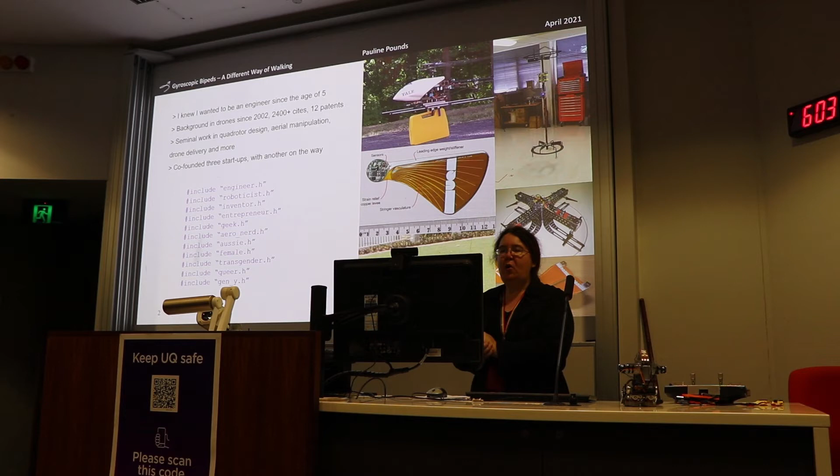What about me? Well, I'm kind of weird. I wanted to be an engineer ever since I was 5. I didn't know what an engineer was, but I knew I wanted to be one. I wanted to be one of those people who builds cool things, who builds complex assemblies and constructions and devices. You know, all the other kids wanted to be an astronaut? I wanted to build the rocket those poor saps would have to fly in. Those fools. Yes.

I've been working in drones since 2002, which seems a long time ago now, and I guess it is. But for me, that was actually during my 4th year at university. It was during my thesis project. So the work that many of you guys are doing, you for instance, who are currently my thesis monkeys, right? That actually was the start of my career in building robots. And my background's in particular on drones. So unmanned aerial vehicles, flying things, rotorcraft in particular.

And I did some of the early work that people still today care about in making quad rotors robust and stable, and in particular improving their flight time and flying characteristics. I also did some of the early work in drone manipulation. You can see I have a picture up there of my postdoc work at Yale, where we were actually the first to do grasping of unstructured objects with an aerial vehicle outdoors. So if you are familiar with Amazon's delivery drones and some of Google's projects in that area, we actually got there first. We did it back in 2010.

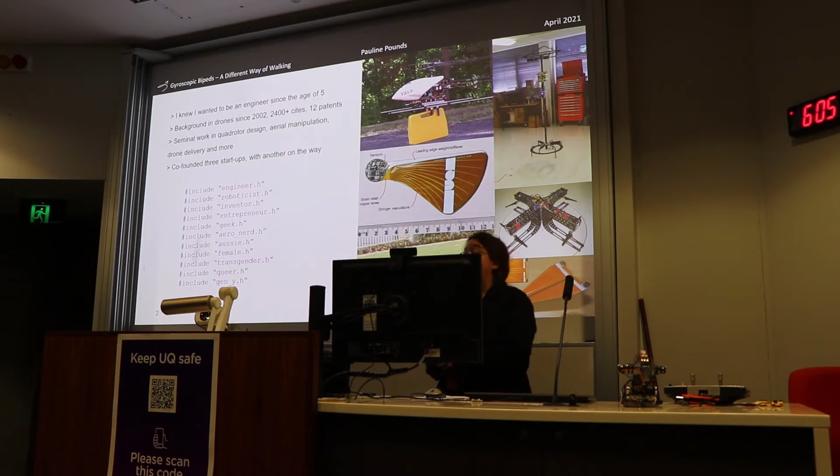I'm also a serial entrepreneur. I've co-founded 3 startups. I have another startup on the way. And I'm sort of one of these people who's been around a long time in this space. And I have watched it grow from something where we built everything by hand. That's a $60,000 aircraft back in 2005, all the way up to building things that today are the modern equivalents that cost a fraction of what they used to be, and yet still do the same thing. So it's a fascinating project.

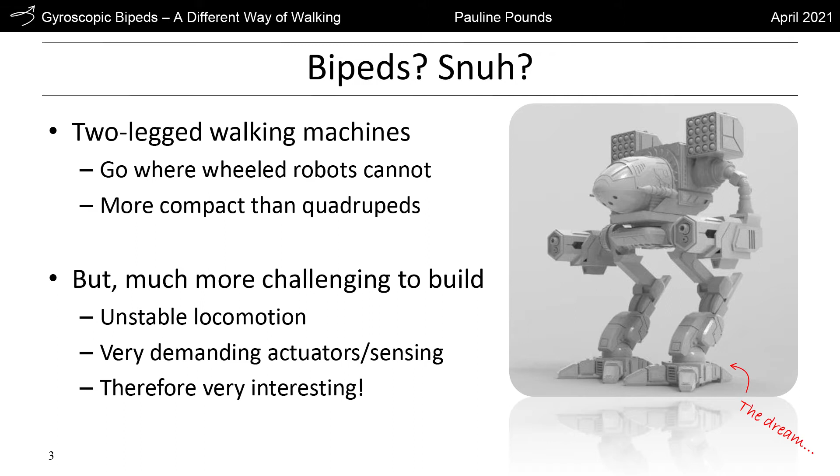So bipeds, very, very different from flying vehicles. Why didn't I get into bipeds? Well, the simple answer is no one was building them. I actually asked when I was looking for a thesis project when I was in undergrad at ANU, I said, cool, I want to build walking robots. And I looked around and they're like, yeah, no one builds that in Australia. It's too expensive. It's too complex and too hard. Look, maybe if you finish a PhD, you can go overseas and maybe someone will take pity on you and let you work with them.

That sucks, right? And 2-legged walking machines are really interesting. I mean, they've got legs, right? Legs are cool. I have legs. You have legs for the most part. In fact, chances are very good you have an above average number of legs.

Considering that wheeled robots are stuck rolling around on flat surfaces or ramps, the fact that bipeds can engage with discontinuous terrain and go places where they can't go, it's actually pretty impressive. And quadrupeds, so far as walking robots go, are relatively simple in comparison. You always have 3 points of contact on the ground, you always have enough volume and space in order to balance. You never have to worry about the dynamics of a quadruped unless you're doing something fancy.

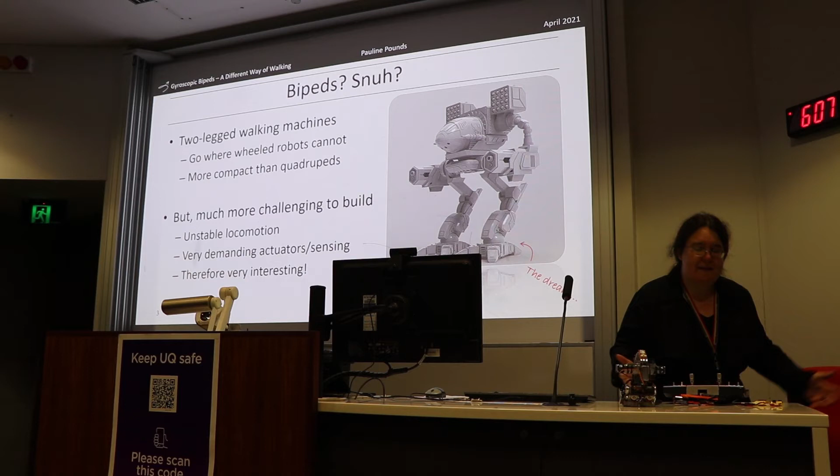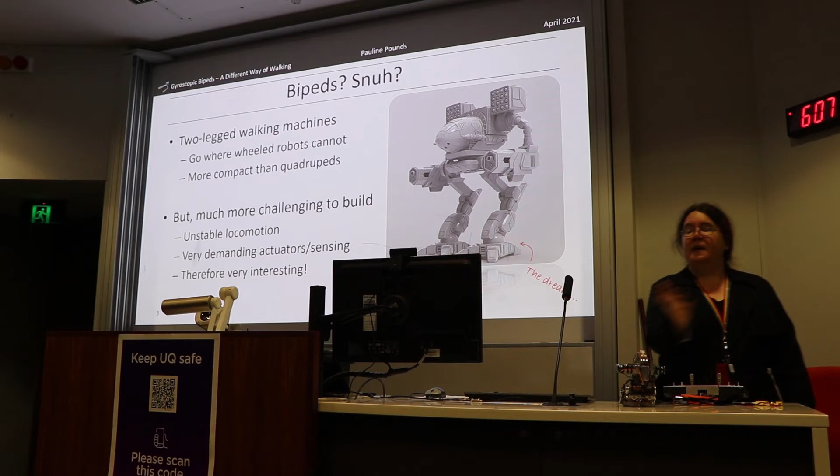And the other thing is, I'm also a bit of a weirdo, and I'm a huge MechWarrior fan. Like, huge. I actually had my Battletech MechWarrior collection valued to be about $10,000 back in 2008. I had the largest collection in the southern hemisphere of such things, and if you try and quiz me on it, I will destroy you. Because I'm a nerd, right? As one of my favorite ones, and that's my dream. I want to build a giant fucking robot to crush the cause of my enemies. Who here has similar dreams? Who here doesn't have such dreams?

I thought not, right? There's a joke that we used to tell in engineering circles, which is that mechanical engineers build weapons, and civil engineers build targets. We're all mechatronics engineers. We build smart weapons.

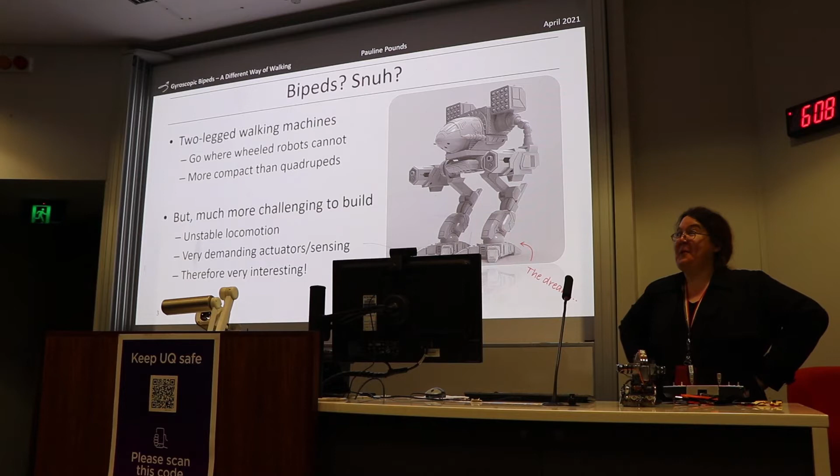Excellent. All right. That's great to talk about, but how are we actually going to do this? Now, one of the things you might say is, hasn't Boston Dynamics kind of done this? Like, why bother? They already have people pushing these things around and kicking them and hitting them with sticks. Yeah, I look forward to hitting mine with sticks, too. You think this is done. Like, why are we wasting our time with this? Does anyone know why this is worth doing if BDI has already done it? Any takers? You already know, yeah? Because it's hella expensive.

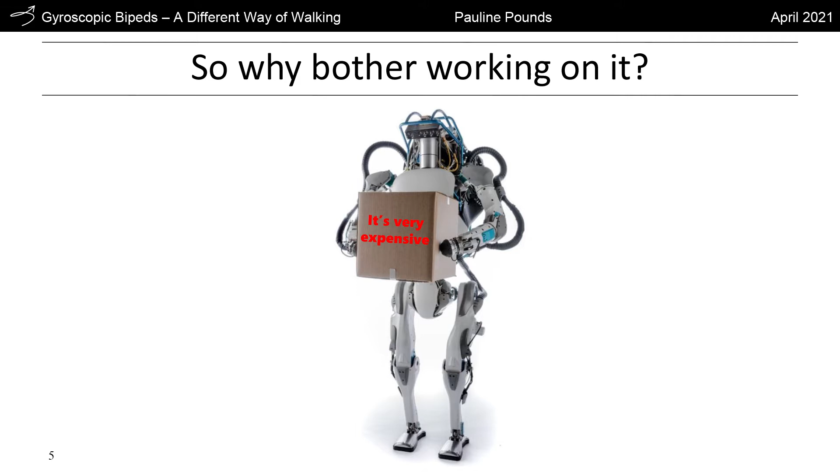It's fuck off expensive is what it is, right? How much does an Atlas cost? Does anyone know? No? 2.3 million? Where do you get that number from? My butt. Yeah. Okay. Your butt's probably the right shape of the answer, but the thing is, I don't know either, because they won't tell you. They will not disclose how much it costs, but estimates are somewhere from $1 to $2 million each. Why? Because so much engineering goes into this thing. The actuators in particular are extremely capable. They have to be fast and precise and accurate and strong all at the same time.

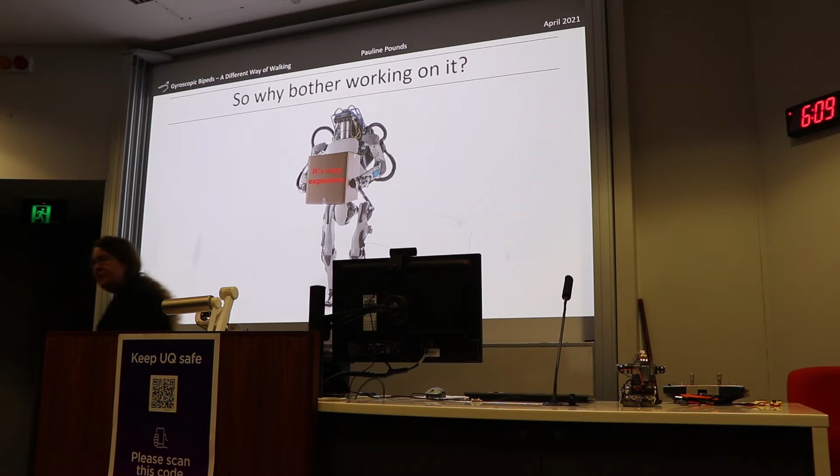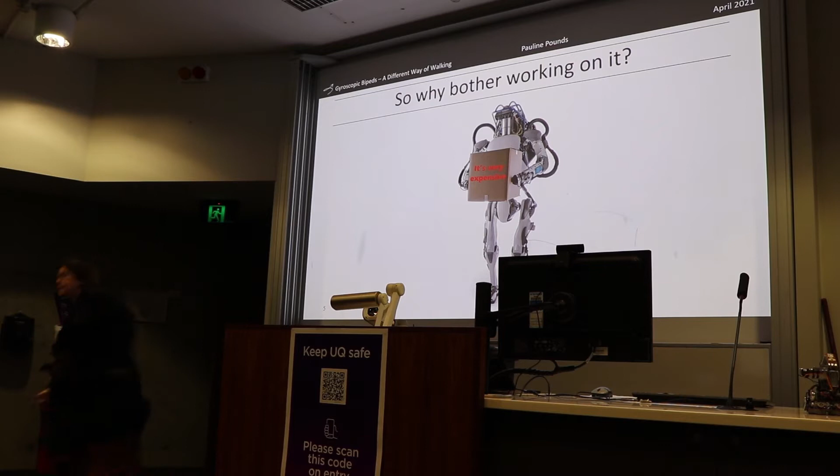Because think about it, what's Boston Dynamics Atlas doing? He's constantly trying to put his foot in the right place at the right time, to push off with exactly the right amount of force, push him back to where he needs to be. So if he ever goes off course, he always has to make a motion to bring him back to the right place. And if he gets it wrong, if he overcompensates, well, problems. And that's an expensive thing to have go terribly wrong.

So, gosh, it's difficult. And there's lots and lots of applications where we would like to build shit like this without it costing the earth. Things like courier delivery, compound security, walking around a shopping mall parking lot, urban patrol, wandering the streets at night, keeping it safe from people like me. Having these things just wandering about, looking for cracks in the road, looking for unstable footpath geometry, or having them do something more interesting, robo-butlers. I'm sure you can imagine some other things that they could be useful for.

So what do we need to do these tasks? First of all, compact bipedal stance. Yes, we could do them with quadrupeds, but we wish to go places quadrupeds cannot go. The human world is built around humans, monkeys, vertical bipedal apes that wander about on two legs in a narrow cylinder shape, sort of convex hull. And there are lots and lots of narrow, tight passageways where a human can get that, say, a horse could not. Now, a dog could probably do it, but a dog can't carry as much as a human can, even a very large dog. We also want rapid dynamic gait.

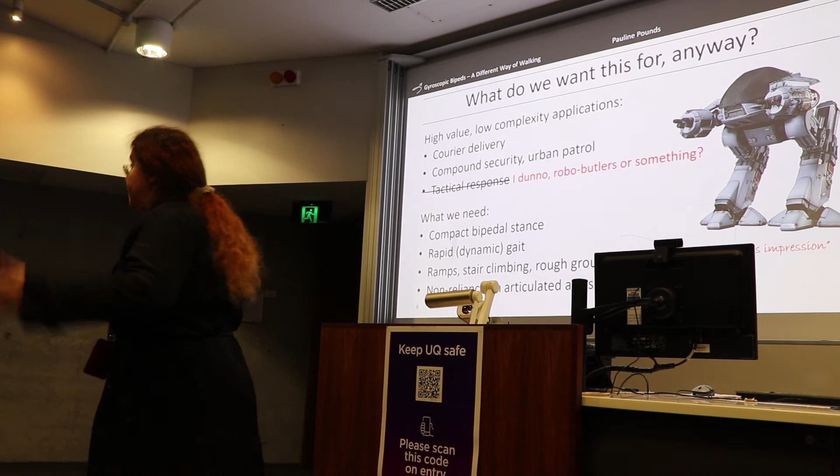Quite aside from that, it walks like that, where it puts its foot down, translates its weight, picks it up, translates its weight, and it's always stable everywhere it goes. It has this very distinctive gait as a consequence. And it looks like your grandma, because basically that's what it is. Right? That's how your grandmother walks, so that if anything goes wrong, you can just kind of stop, and you're still stable. And as a result, it's very slow.

Now they're trying to make them go faster, but there's kind of a limit to what you can do with the construction and the quality of actuators that they have. Boston Dynamics started out by saying, let's make them quick, agile, dynamically stable systems. Great, except expensive. We also want our systems to be able to handle ramps and stairs and rough ground, and not just smooth, beautifully perfect, conference room interiors, right? Because you just use a freaking wheeled robot then, right? Why would you bother?

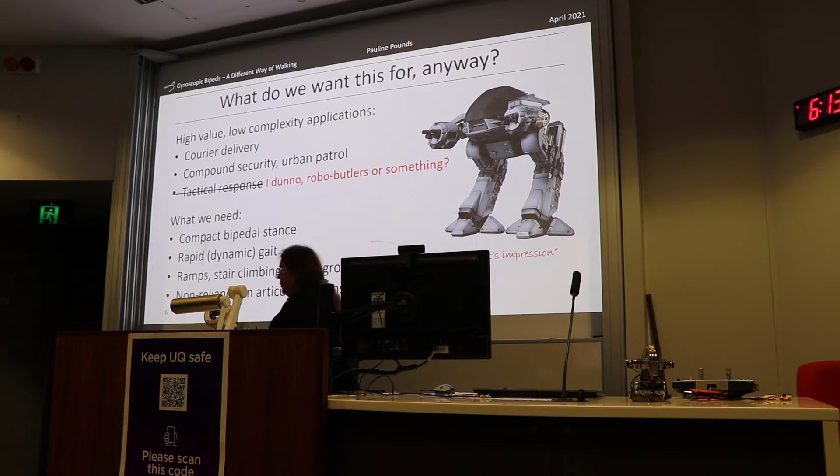And finally, we don't want to rely on articulated arms for balance. One of the early tricks that people played with walking robots is they would basically have these flailing appendages. Right, except if you want to walk through a doorway, you can't fit with your arms all the way out. So we need something which can do all of these within some limits.

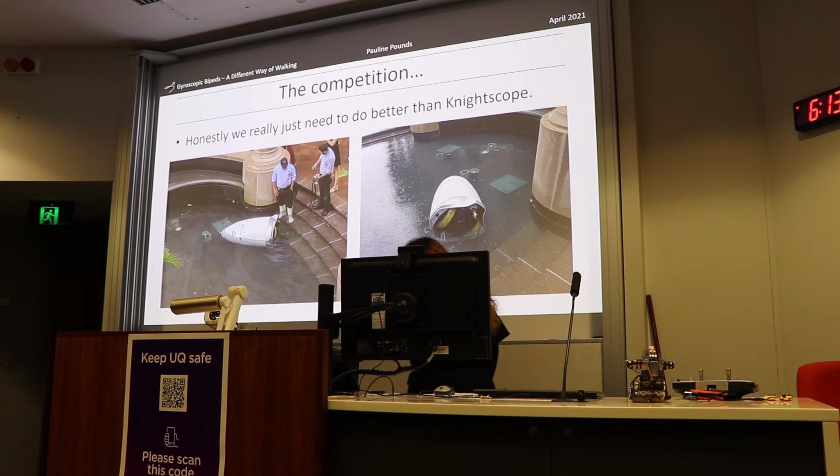But let's be honest, we're not really competing with BDI here. BDI, they've got the DARPA contract, right? They're the top of town. We're competing with guys like these. Knightscope. You may not have heard of Knightscope before, but you may have seen some of the hilarious internet memes that have come out as a consequence of one of their first deployments being this sort of oddly Dalek-shaped thing that immediately rolled around a shopping mall, saw reflections off the water, and thought it was a tiled surface, and rolled into a fountain. Oops, awkward.

And if you search for Knightscope, these are images number 3 and 4 that come up. This is all that anyone remembers Knightscope for. So enough fooling around talking about what we're doing and why we're doing it. Let's build some legged things. Legged things, how hard can it be? Well, it turns out there's a lot going on.

We have friction. Hey, friction, we all love friction. It stops us sliding off the earth. Stiction, which is kind of like sliding, kind of like friction. Sliding, surface elasticity, limb kinematics, limb elasticity, limb dynamics, servo nonlinearity, force saturations, power limits, sensor noise, deflections. Gosh. Okay, actually, even before we get into things like backlash and hysteresis, there's so much going on, right?

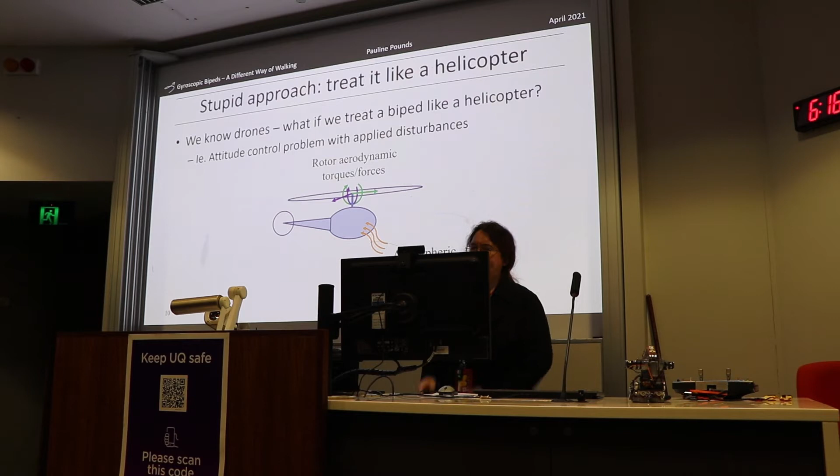Now, the fact you're here and the fact I'm giving this talk and I've wasted your time with me talking like that, you probably infer that, yes, there is an easier way. If only we could decouple our locomotion from our orientation mechanics. If only we could make it so we could deal with one problem at a time. So, here's a stupid approach. I'm a drone person. I drone sometimes.

I have all of this expertise that I've put together in doing orientation control, orientation regulation, flight dynamics, 6DOF orientability matrices and manifold Hermitian compact somethings. You all love Hermitian matrices, right? Yes? Are your sets compact? I know they are. Okay.

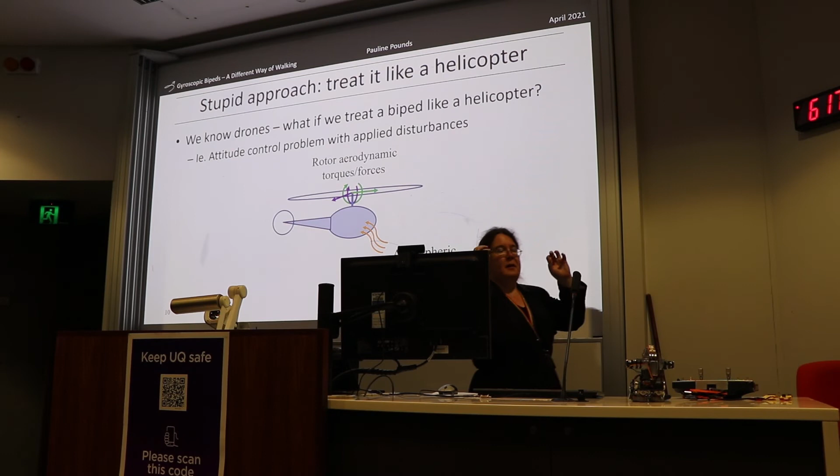What if we treat a biped like a helicopter? What if we say, okay, I'm going to worry about the orientation. I'm just going to keep the damn thing upright. And for a helicopter, we have these disturbances that enter the system. The rotor does all the orientation control by developing torques, and disturbances enter. And we reject the disturbances through control.

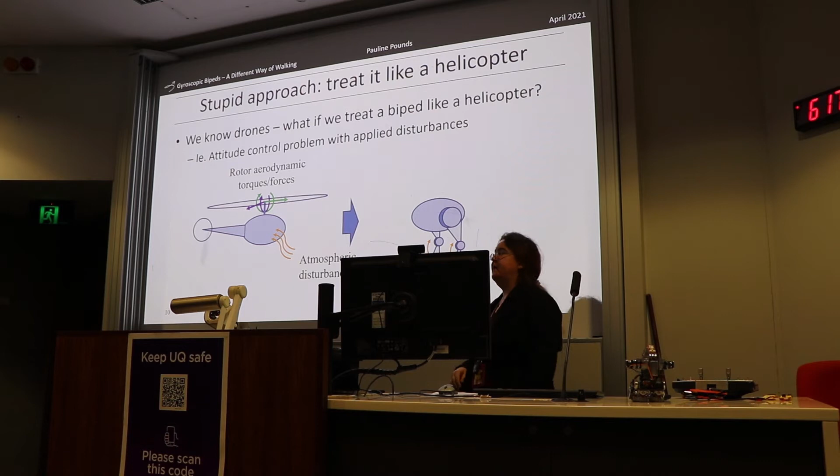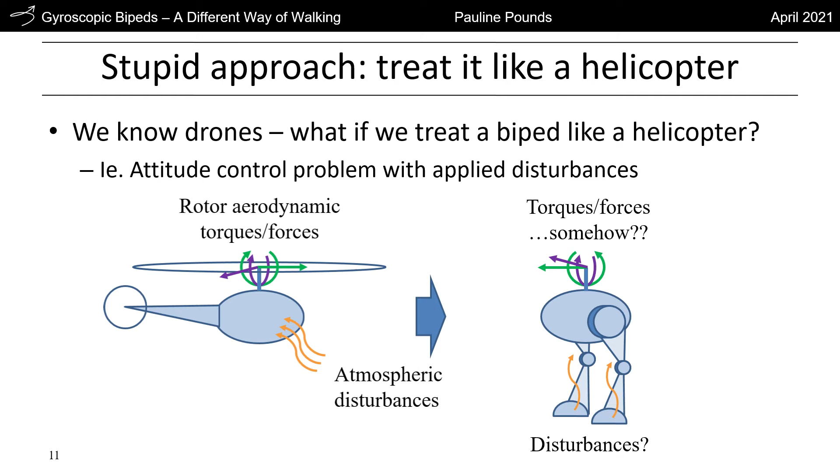If instead we have a biped, and we say, well, we know there'll be disturbances through the feet, but as long as they're small enough, we can play the same trick. And we'll somehow produce torques and forces in the body, and everything will be okay, right? Brilliant. Problem solved. Great. See you at coffee. No. We come back to the slide you saw before. How do we generate these forces and torques? They're magical. They rise from nowhere.

How do we generate magic? Anyone know how we generate magic? I guess would be accelerating and decelerating. Interesting. Magnets. Magnets. Yes, magnets are fucking magic.

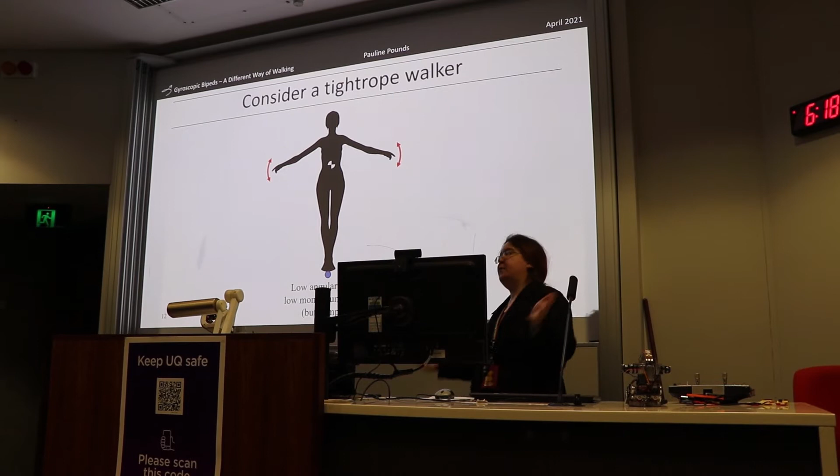Flywheels, all right. Consider a tightrope walker. Balancing on one foot, I have no contact with the ground, so I can't really produce torque through my feet. I have to waggle my hands, and that acts like a reaction wheel. Waggle my arms, whoop, whoop, whoop, and I transfer momentum between my arms moving and my body to keep my center of mass on top of my fulcrum.

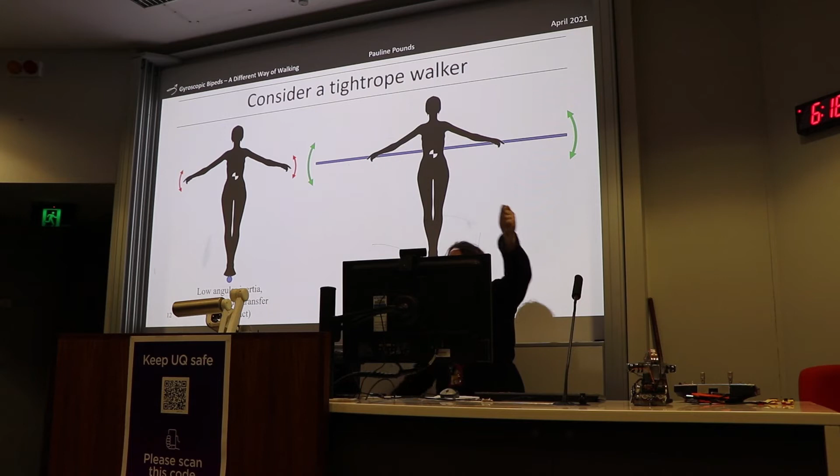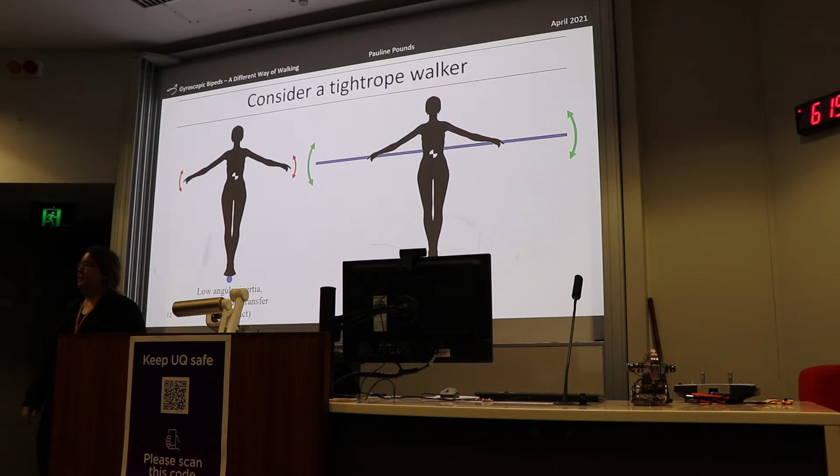However, you only got so much arms that you can waggle. So we aid ourselves by having longer arms, like a balance staff. It's much bigger, and a smaller motion gives us more momentum transfer. That's large, and it's unwieldy. Remember how I talked about people building robots with flailing arms? That's exactly the principle they're using, and the same problem applies. How many of you ever walked with a balance staff through a doorway? You may say you've tried to, but you haven't actually succeeded.

This is a form of reaction wheel, where we can accelerate a spinning object in order to balance things. This is some wonderful work on a robot called Cubli by the guys at ETH Zurich. There is a voiceover, but it's boring. Here you can see they're balancing on one corner, or on one edge, and they can move to the pinnacle just by accelerating and decelerating their wheels.

Cameron, you know all about this one. He's basically working on a similar system for me. Work harder! Why are you here? There's work to do. All right.

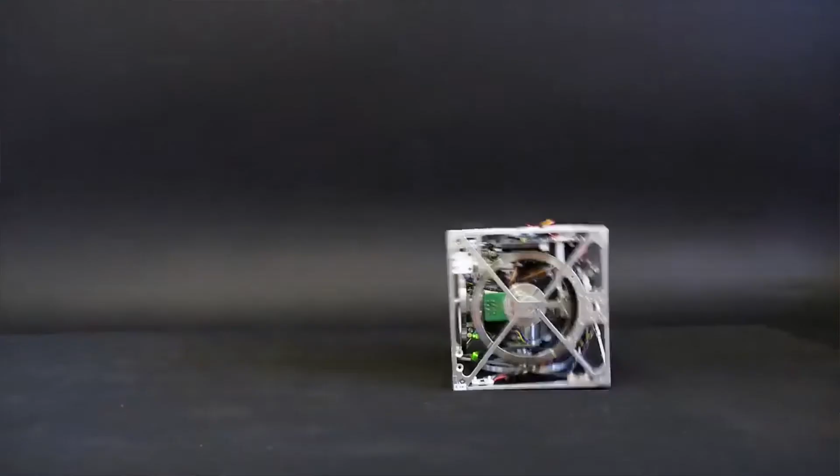So it's cool. In fact, reaction wheels are used in things like satellites. They've been used in ships. They've been used in rolling robots, like the gyrover, which is just one big spinning wheel thing. Things like Murata Boy and Murata Girl, unicycle and bicycle robots. Very neat. But why not reaction wheels? Why not just do that? Well, first of all, it's boring because it's being done. Yawn. Second of all, there are some problems.

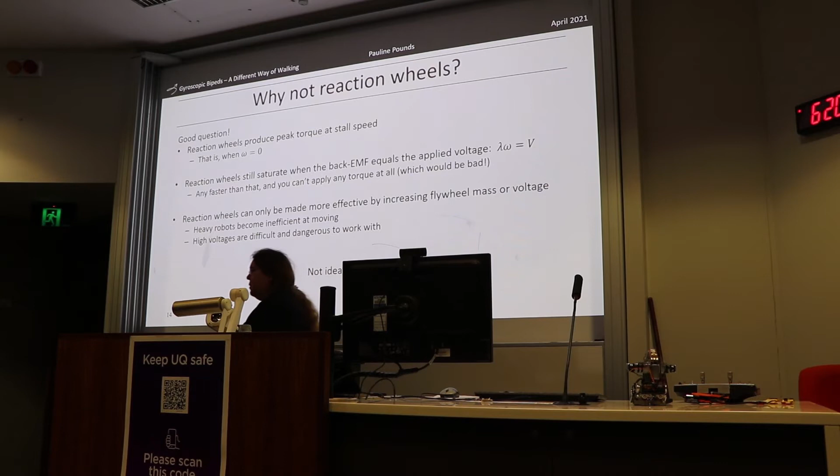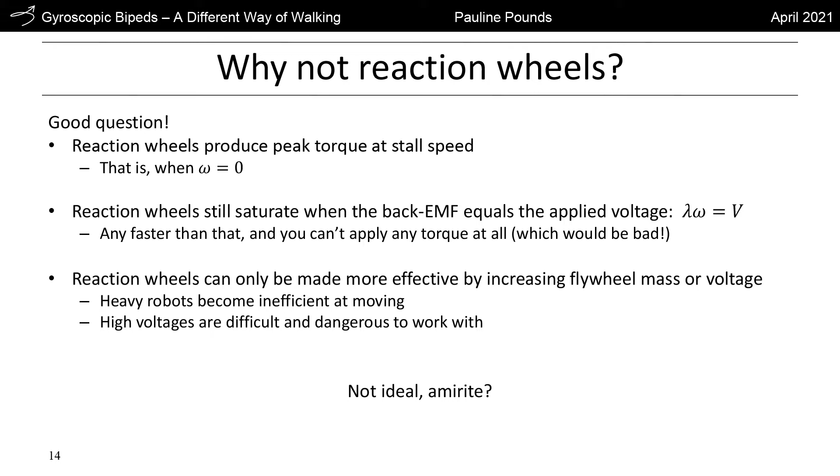Firstly, there's only so much torque you can get out of these. Most of that torque is available when the reaction wheel hasn't started moving yet, what's called stall, which is great if you start off at zero. But once it's moving, you have back EMF induced by the rotation. Anyone not know what back EMF is? It's cool, I won't hold it against you. If it spins up until the back EMF equals the applied voltage, you're not going to get any current flow, no applied torque. So you can't spin any faster. You're stuck.

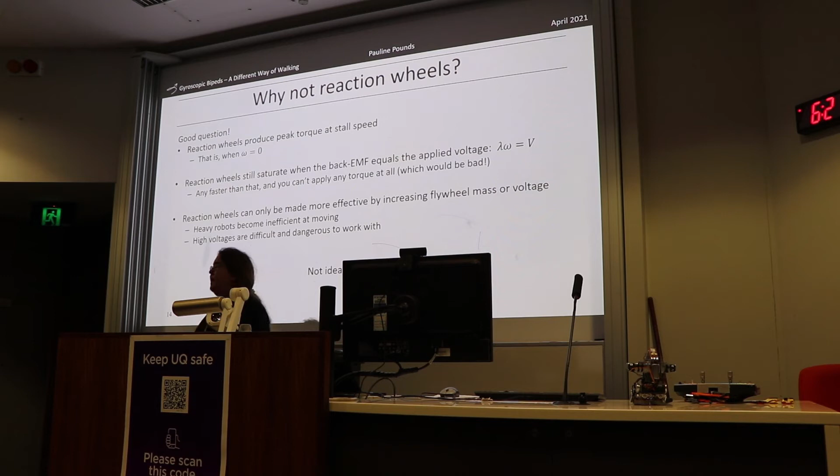And your reaction wheels can only be made better by increasing your applied voltage or the mass of the flywheel. You can increase the size of the flywheel, but you can only make your robot so big and still call it tiny. A big heavy robot with a big heavy flywheel takes a ton of energy to move around. A robot with a huge voltage means dealing with high voltages, and it's a pain in the butt. That's not ideal. What are we going to do? Surely there must be another way. As you've probably guessed, there is.

That is my good friend, the control moment gyro, CMG for short. What if we use a high-speed spinning wheel and don't accelerate it in its axial direction, but rotate it orthogonal to its spinning axis, and use the resultant gyroscopic precession to induce useful torques? You all know what precession is? I will show you precession. The cool thing is, if we use precession for our control torques, legs don't have to do anything. Our legs can be completely floppy. Behold my floppy feet.

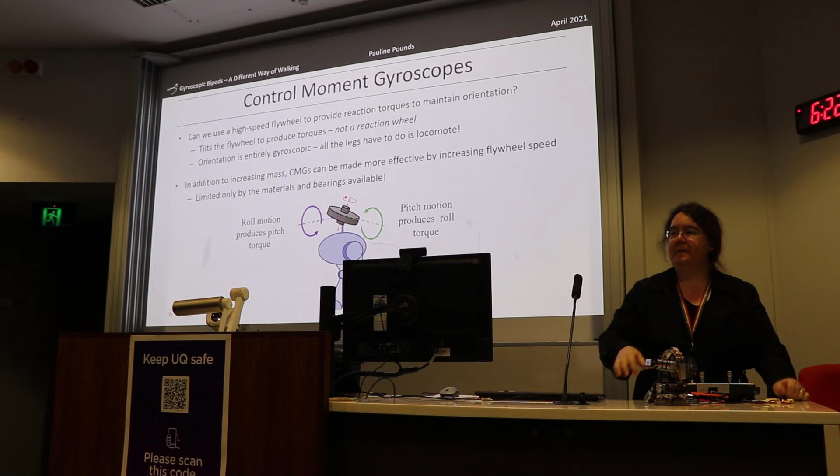And the other cool thing is, yes, you can increase the mass of your gyroscope to get better performance. You can improve the rotational inertia by moving more mass towards the edge of the CMG, but you can also just spin it faster. More speed equals more momentum transfer, all the way up to the limits of the flywheel's materials, until it tears itself apart from rotating too fast, or until the bearings give out.

And we spin our bearings right at the point where they become a consumable and slowly eat themselves, which is hilarious. There's a 90-degree offset, so rolling motion produces pitching torques, and pitching motion produces rolling torques. And I have a demo for you.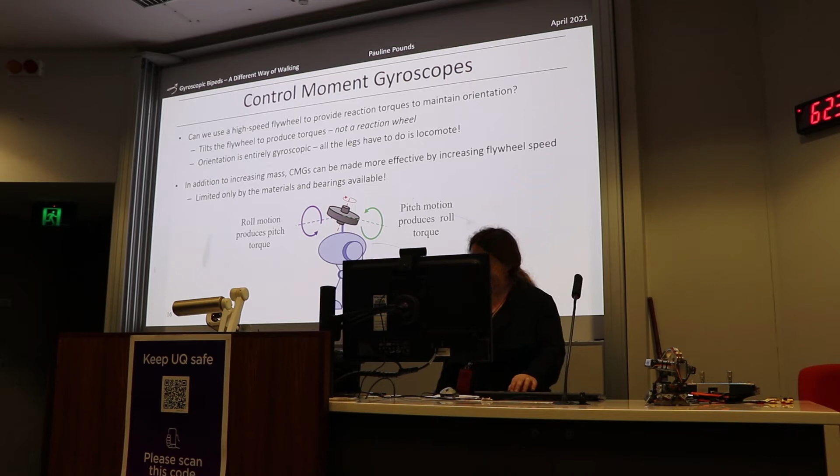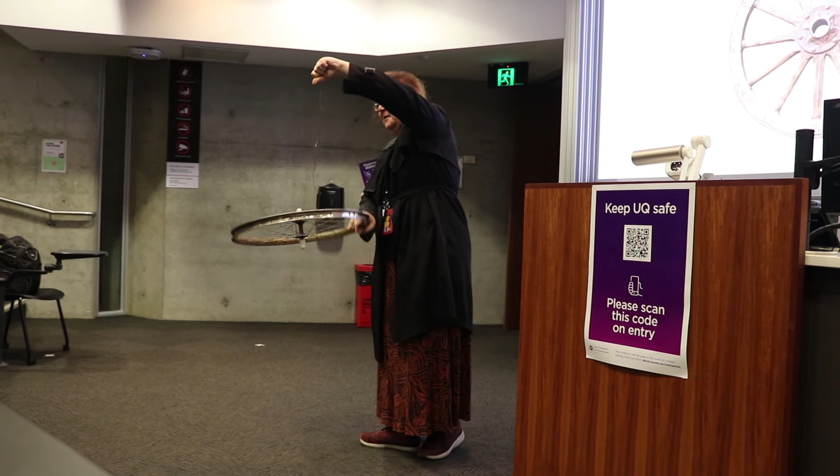Behold! The wheel! So if I take my wheel and I suspend it from its thing, I just kind of, oh, it's so sad. But you all were there for like high school physics class, right? This will not be a revelation for most of you. But for some of you, this is going to blow your freaking mind.

It stays vertical. But you'll notice it's rotating at an angle because the weight of gravity is pulling it downwards and producing a rolling torque. And now it's slowing, oh, and gyroscopic stops, and it goes back to being level again. So it's the torque balance due to the rotating object that keeps it vertical.

And now I'm spinning it in the opposite direction, and so it's precessing in the opposite direction. And if you all remember in high school physics class, if I try and turn this level with the ground, you'll see it actually kicks out sideways. That's because of that precession effect. And even if I try my absolute best to keep it level, I'm actually fighting my own strength when I try and turn it in the plane. And that's the effect we're exploiting.

If you've never handled a bicycle wheel before because you lived underground in a cave or something like that, come up and play with it afterwards. You're welcome to experiment. I didn't invent the wheel, by the way. I'd like to take credit. Not that old. I'm not that old. I'd like to take credit, but I can't.

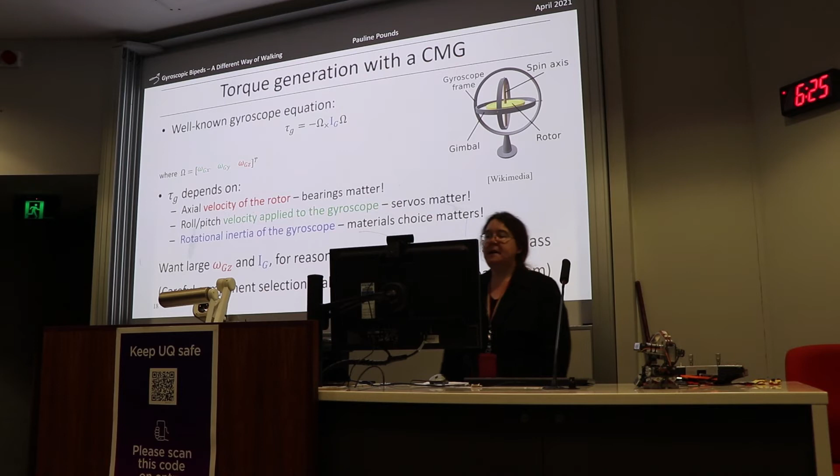So torque generation with a CMG. There's the well-known gyroscope equation. If you haven't seen it, don't be afraid, it's okay. It's well known for people who work with drones. It's a matrix equation. That weird little subscript X is a skew vector operator. Basically, you're taking the skew symmetric vector matrix of omega there. If it doesn't mean anything to you, don't worry, come and see me, I'll explain it after.

But omega here is just the axial velocities of all the components of the rotation of the rotor of your gyroscope mechanism. And the amount of torque you get out depends on 3 parameters. Thing number 1, the axial velocity. So the better your bearings are and the faster you can spin, the higher your, I hesitate to call it transconductance, but effectively your transconductance in a mechanical sense would be. Basically your ability to outsource your momentum in one axis to the other.

Then you have your roll and pitch velocity applied to the gyroscope, orthogonal to the rotational axial velocity of the gyroscope, and then your rotational inertia. So your materials choice matters, as does your servo ability to turn the whole box and dice. So if you have high omega, high I, and high cross-axis omegas, then you can get away with relatively low mass for the same amount of torque generation. Why does this matter?

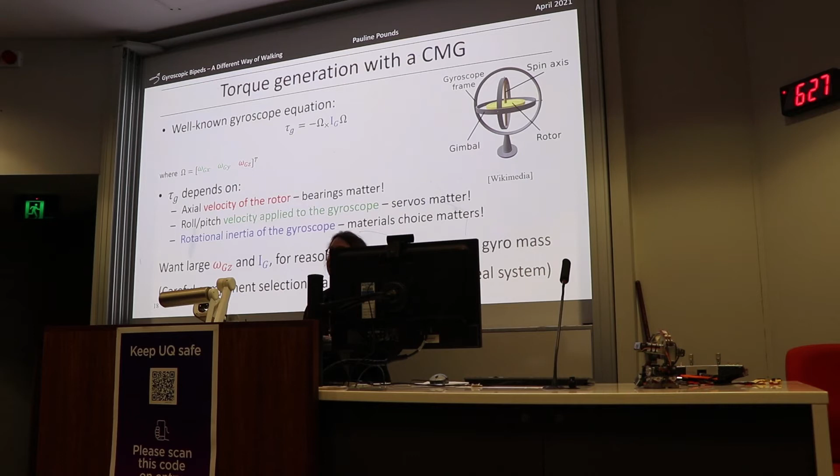Because if we want to build a real system, we don't want a honking big-ass gyroscope, we want something that's actually light enough for us to carry around. And humans are good at a few things. We're really, really good at building good bearings. We put a ton of effort into good bearings. We're not so good at manipulating the structure of space-time, so mass is kind of one of those things we can add or take away. We can't do much else than that. And actuators, we're okay with actuators, but we're not great. So focus on your strengths.

Now, if we build our system correctly, we can get away with a tractable system. So let's aim for something small and safe to start, say around the size of a chicken. So a 1.5 kilo platform is what we targeted. We're going to need 2 actuated degrees of freedom for each leg. We need a knee, we need a hip, and we're going to need a servo in the foot in order to be able to turn on the spot.

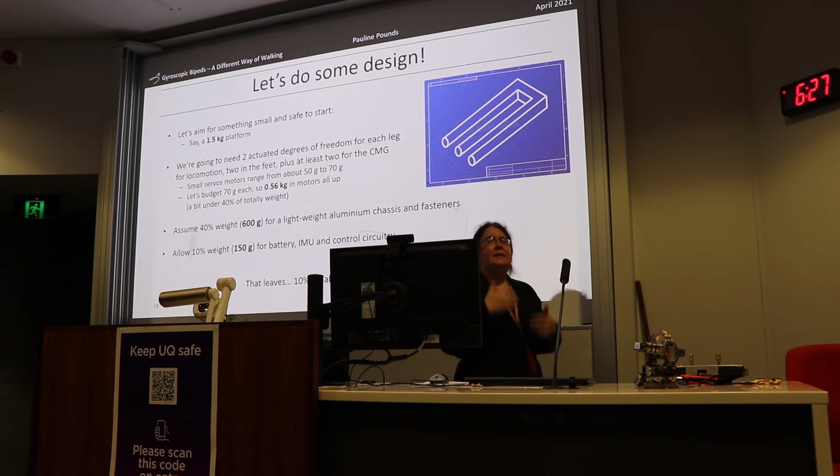And we're going to have at least 2 servos for each axis of the CMG. Now, we don't have to have 2, but I'm lazy and I didn't want to build another bearing myself, so we just pinion between 2 servos on either side. Makes it easy. Small servo motors, about 50 to 70 grams. We have 70 grams to budget for each, so if we sum all of our motors, let's say we get 0.56 kilograms for all of our motors all up, which is a bit under 40% of our total body weight.

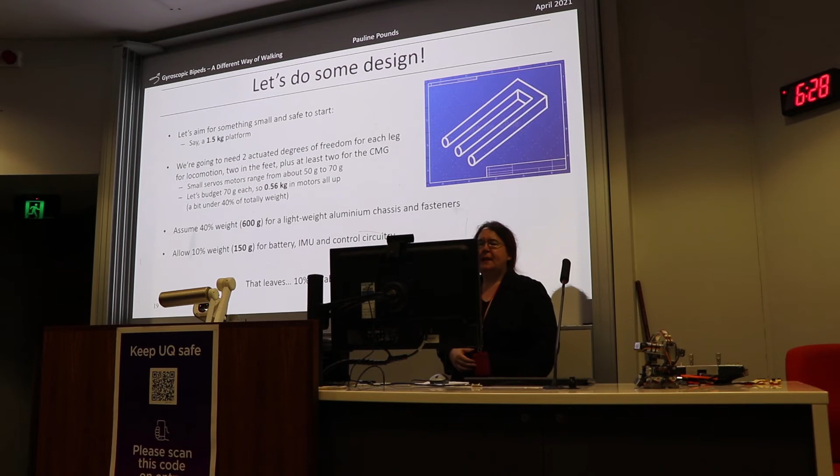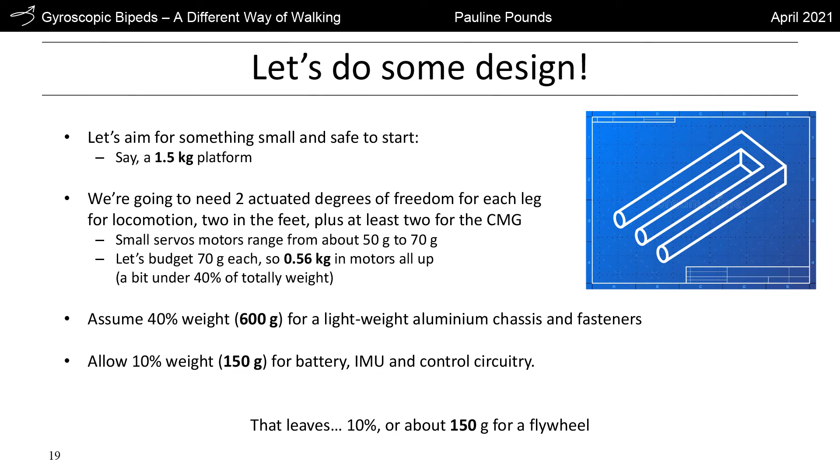If we have 40% body weight for a lightweight aluminum chassis and all the fasteners and all the other bits going into it, that gives us about 10% left over for battery. So 10%, 150 grams left over for battery, IMU, and control circuitry, and 150 grams for flywheel. 10% mass of a flywheel. Does that seem sensible? I don't know. All right. Let's do some math on that.

If we actually try and source real parts and do the designs, then we end up being a little bit under mass. We get about a 1.3 kilogram biped, which is the one we built. It's 240 millimeters tall, 150 millimeters at the hip, which is sort of the dimension that matters for scaling bipeds. And the ankles are 45 millimeters apart in the center. 156 gram gyroscope, because we save some mass, I could safely be a little bit over mass. Made from 316 stainless steel. We end up with 1.42 times 10 to the negative 4 kilogram meters squared of rotational inertia.

And the gyroscope motors we've chosen give us 180 degrees of travel. So we can turn our gyroscope gimbal a full 180 either direction. Right? We can spin up to 23,000 RPM using brushless DC motors to drive our gyroscope. We need to spin at least 13,000 RPM to make it stable. How do I know this? Because I spent some time doing the math, and I'll go through that in just a minute. What we actually run at is about 15,000 RPM, slightly more than what we need, just as a safety margin. It means that as our bearings start to wear down, we can still have our speed drop a little bit before we run into troubles.

So if we had all of this, our knee servos would need to provide about 13 kilogram centimeters torque for mobility. Our gimbals would have to be able to source half of that, because weirdly enough, the knees always have to be able to provide twice as much as the overall torque loading on the biped itself. And that turns out to be a function of the geometry of the cantilevered knee structure. We can use basic hobby servos for this.

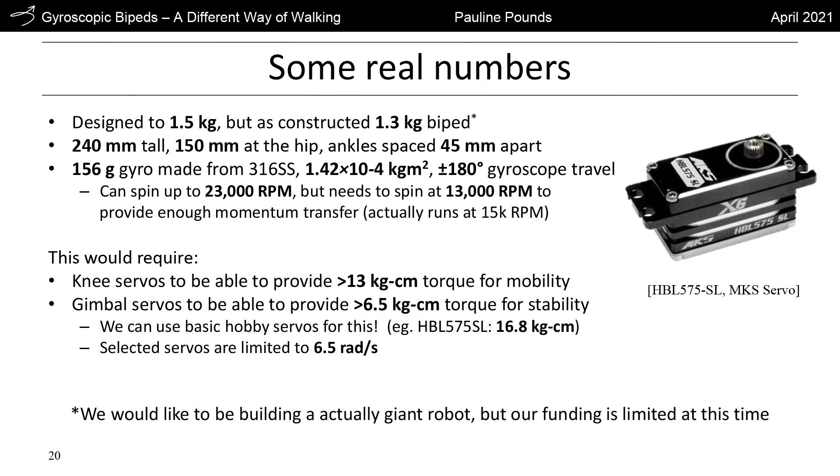Now it's worth making a note about safety here. Way back in 2004, I showed you on my slides that black thing that I built. It was a $60,000 robot. We didn't know what we were doing. We'd never built a quad rotor from scratch before. It was a 4 kilo aircraft, and it had rotors that went a third the speed of sound. Mach 0.3. You can calculate how fast that is. What I didn't tell you then is that the rotor tips were also 0.2 of a millimeter thick at the tips. They were knife edge sharp, and they were terrifying.

Dangerous designs can sneak up on you. We didn't plan on building such a monstrous thing. We just sat down, did the numbers, and calculated what we needed to build. It wasn't until we turned the damn thing on we realized, we could feed a cow in one end, we could get paste out the other. This is not good, right? We didn't even think through the ramifications of what we're building. So don't let dangerous design sneak up on you. Think about the energies and velocities involved in real terms if you can.

So let's do a quick calculation. E equals a half I omega squared. You should all recognize that calculation. Anyone not recognize the calculation? Yeah, I wouldn't put my hand up either. You guys are honest at least. All right, but that's the rotational energy of a rigid object rotating at omega velocity in radians per second with a rotational inertia of I.

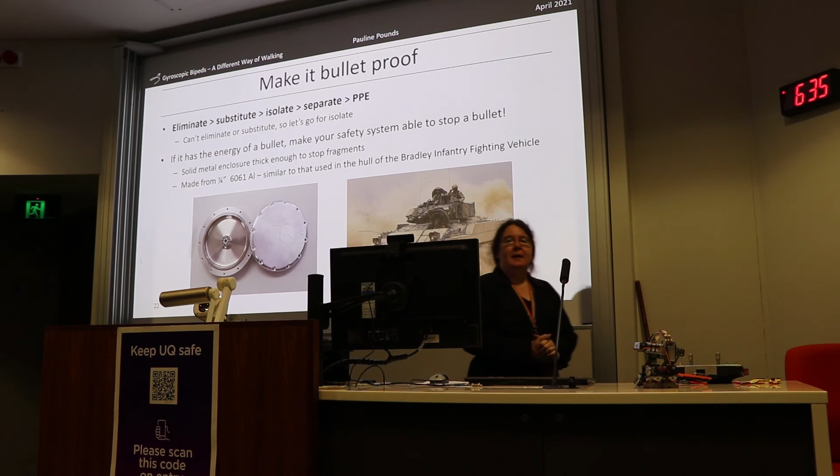So if you're going to build something that shoots bullets, let's make it bulletproof. And so we did exactly that. There's the adage in engineering safety of saying eliminate, substitute, isolate, separate, PPE. The hierarchy of safety. If you can eliminate the deadly, dangerous thing, do it. If you can't, substitute it with something that's less deadly, less dangerous. And if you can't do that, put it somewhere far away where it can't hurt anyone. And if you can't do that, at least keep it not touching you. And if you can't do that, well, that's what PPE is for. PPE is the last line of defense, not the first. All right? We can't eliminate or substitute, so let's go for isolate if we can.

So we've built a thing, and I don't have one here with me, but I should have, which was basically a gyroscope housing made out of 6061 aluminium, which is very similar to that used by the Bradley Infantry Fighting Vehicle, which is also 1/4-inch aluminium, but with a little bit more silicon in it to make it more weldable, apparently. We didn't have to make such compromises. So this is better armor than it has.

We tested that thing on a torture rig. We put it in a mechanized tilt test rig. We spun up to the maximum speed that we could get our motors to go with fresh bearings, and we ran it forwards and backwards, forwards and backwards at its maximum possible cycling RPM. And it didn't fail. It didn't touch the edges. Nobody died. So at that point, we're pretty confident that we had done it right.

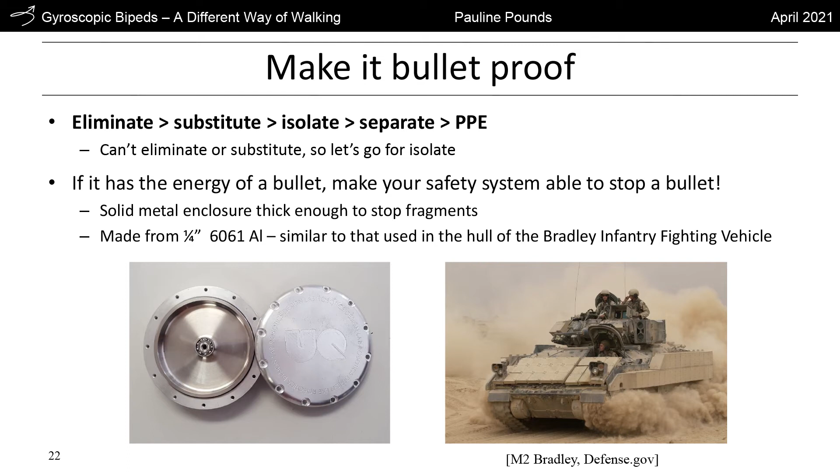Does that mean your robot could take on the Bradley? Yeah, sure. Seems about fair. I mean, you've seen the one between the chickens and the T-Rexes, right? See me after. I'll explain.

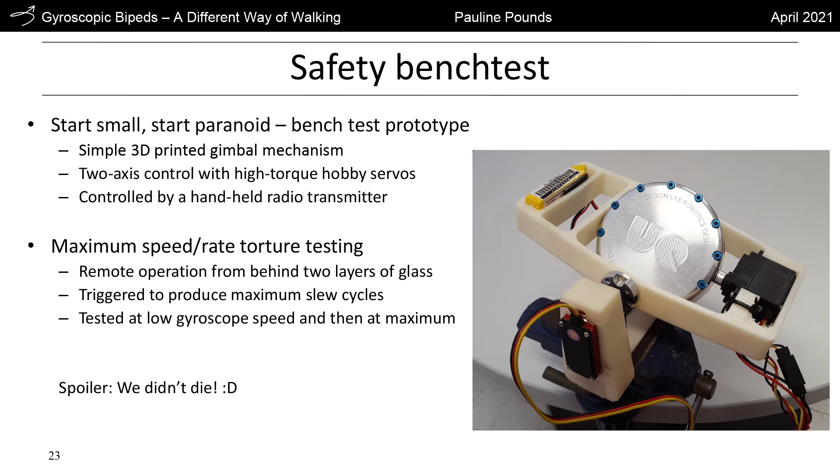All right. So we get paranoid, so we built a bench rig, and we ran the thing and ran the thing and ran the thing. Spoiler is we didn't die. But if you're going to build a thing, think about how you're going to test the thing you build as well. Also, beautiful blue anodized screws, worth investing in. Not for any technical merit, just looks cool.

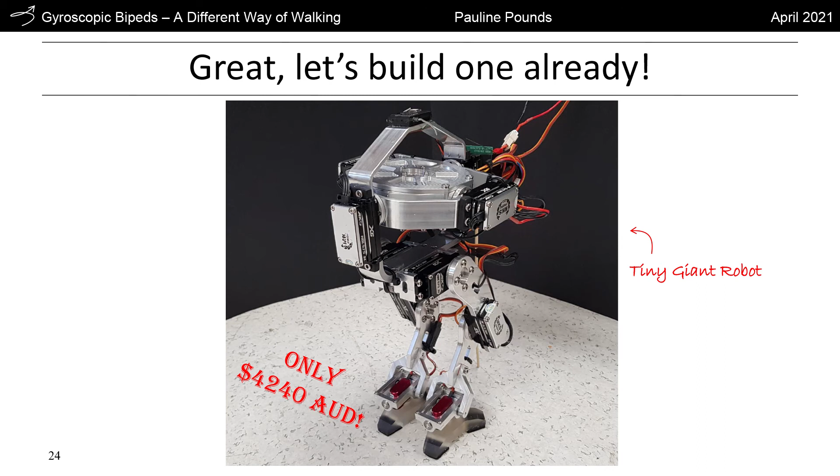Great, let's build one. You probably spotted this as you came in. This is our tiny giant robot. It is roughly the size of a chicken, its actual size, albeit tiny. We'd like to build one big enough to crush the cars of my enemies. We don't have the funding yet. But, speaking of funding, as a one-off research prototype, $4,240 Australian. I don't know if you guys spend a lot of time buying robotics research equipment. You probably don't. That's laughably cheap. Most labs, if they were building a walking robot, would do their initial developmental stuff with a zero at the end.

What's the major cost of this? Major cost is actually the servos, bizarrely enough. Well, servos and the flywheel. The flywheel that we got built for this guy is about $1,000 worth of machining. The servos are about $250 each, and there are 8 of those in this guy, so you can calculate what that comes out to. 8 times a quarter is what, $2,000? I think I might have missed it. I wasn't really paying attention. Why exactly did the flywheel need to be so expensive? Like the material or the way it was? Because it was precision machined, because it's going to spin at 23,000 RPM.

And if you have a little bit of error in that, well, suddenly it's going to wobble and tear itself apart and fling itself away in all directions, skewer you, the ones you love. Yeah, not fun. So we put some time into getting it right. That said, I engineered it with a safety factor of 3. So I'm pretty confident it's not going to go rogue and kill us all, and it hasn't yet.

In fact, during testing, we had a software bug and the thing did a damn backflip. And the servo motors are way more powerful than they really need to be in the gyroscope. And they move way quicker than they have to. And the fun thing is, if you have the strength to walk, you actually have the strength to do a backflip. So one of the comic things that walking robot developers do is they make their robots do backflips to show that they can do it. But there's nothing fancy about that energetically. The mechanics of walking required.

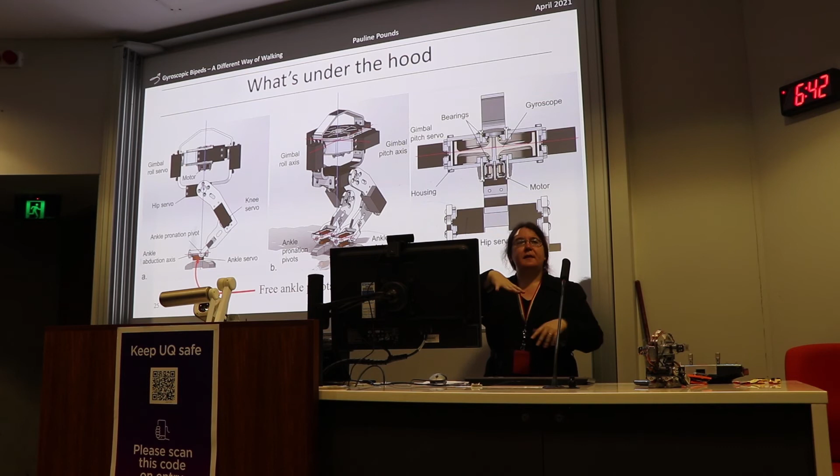Why are the knees the wrong way around? Why are your knees the wrong way around? So the interesting thing about you and your wrong way round knees, flaunting them. The thing is, it's actually the same if it walks forward or if it walks backwards. Chickens and other creatures which actually use their tippy toes as the contact point, digitigrade walking type things, have a sort of secondary knee that provides more compression. We don't care about that. The interesting thing is that it's actually completely irrelevant to us whether they're the right way around or the wrong way around from a dynamics perspective.

Because, in fact, if you look at robots that people built in the late 90s, they all walk with a slight crouch. They all walk like that. And the reason they do that is because it avoids having a singularity with a locking knee. Because from here, I can't actually move my feet directly up or down without using my hip to do it. Right? There's a singularity, and I have to unlock my knee, then I can lift my foot. Whereas here, I don't have to. I can just keep them crouched all the time, which means I have a larger static load, but I have more dynamic flexibility and no singularity.

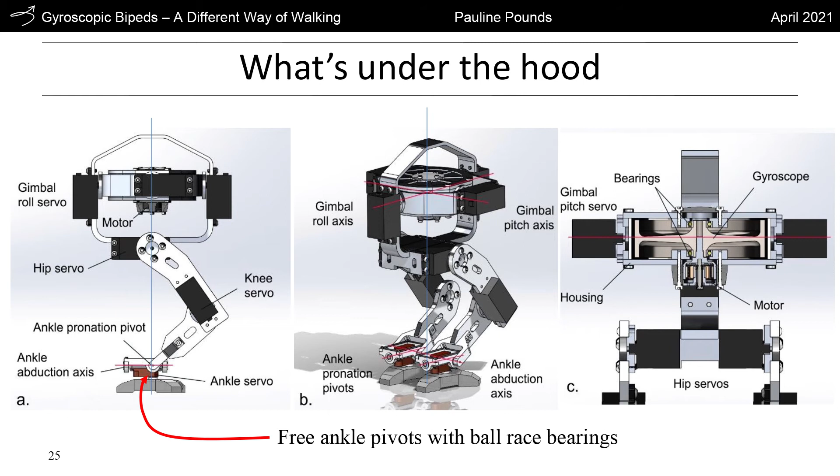I could just as easily make it the other way around, but then it would look weird, because it would look as if it's always walking crouched-legged, and honestly, that's kind of lame. Whereas if you build this like an ED-209, it looks like a death-dealing machine of doom, and honestly, that's what I'm in it for. I'm in it for the toys, right? Okay, so that's why. The knees are intentionally the way that they are. Other questions? All right, moving on.

So how does it walk? It's easy. You just put one foot in front of the other, right? And because the gyroscope does all the hard work, simple pattern generation drives the legs.

All of the computational complexity is driven in doing a very fast control loop between the orientation measurement through the IMU and the gyroscope's motion, which is a bit hard to get your head around because they're all 90 degrees out of phase. But as long as you understand that, you can just kind of disconnect the fact that your control inputs are not the direction you're measuring.

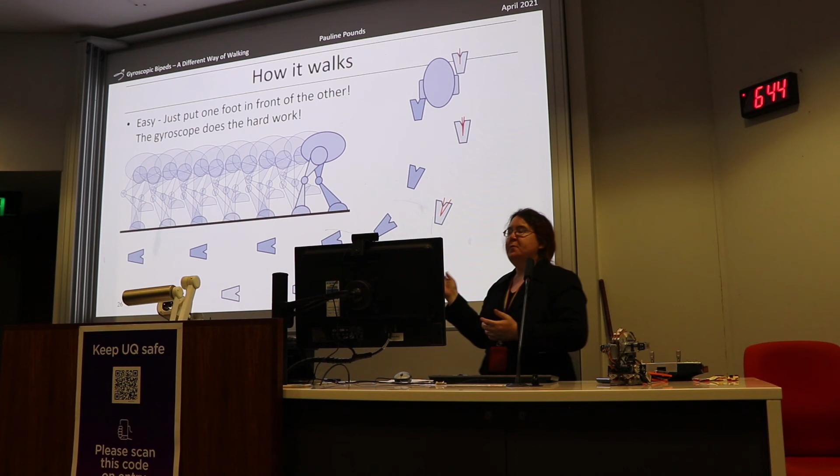It all works out. Turning is interesting though, because if you rotate the feet by some amount, by having a small angle applied each time you move, then you can just rotate the body in a pretty seamless kind of way. The robot doesn't actually have to know what's happening with respect to its leg gait generation. The foot gait and the leg gait are actually partly decoupled.

Okay, so how exactly are we supposed to waggle this gyroscope anyway? I'm glad you asked. So I'm going to warn you, a bit of a hazard here. There is some maths ahead, but it's not too bad. However, I have the appropriate warning labels so you know what you're getting into. If you don't wish to be exposed to math, please leave now.

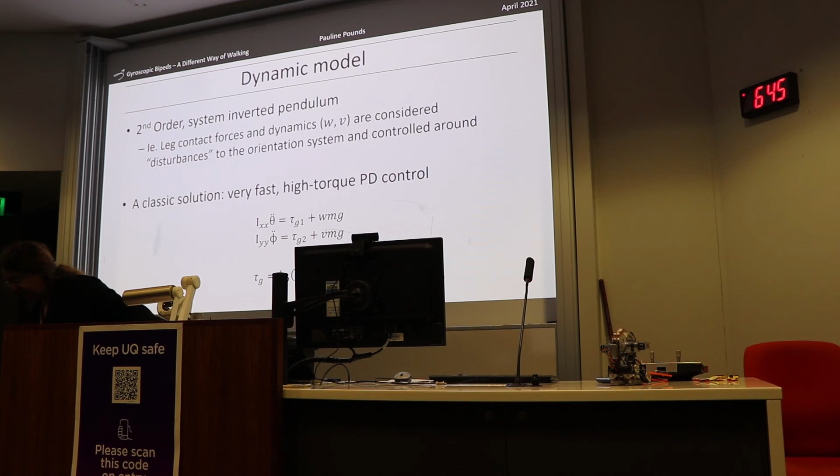All right, so we have a second order inverted pendulum model, which those of us in mechatronics probably will recognize. Basically, we say, okay, we have a foot on the ground, we are pivoting with respect to that point. We'll rock forward, we'll rock backwards. That's all right. As long as we can develop enough torque to stabilize us, we have Ixx theta double dot, Iyy phi double dot, some applied torque, and disturbances. These disturbances are mg, the gravity pulling down on the robot, and some displacement from the contact point. This is our inverted pendulum compass model kind of thing.

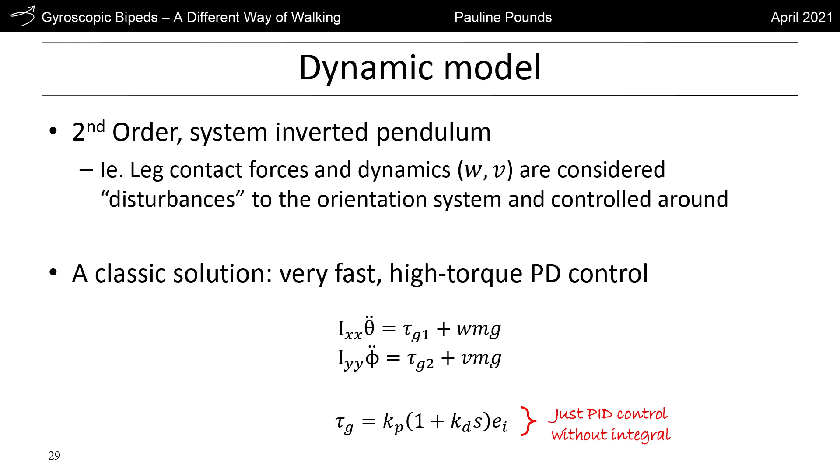So all we have to do is generate TG. There's our torque control. And you know what? We know inverted pendulums, we're just gonna throw in PID, easy. We don't even need the integral. Not really, that would help. Okay, maybe we can put it in later. Don't stress. All right.

Well, what about that V and that W? Those disturbance values. Well, every time we lift a leg, we're going to be off balance. So if I pick up my foot and start moving forward, I'm going to want to tilt forward. I know there'll be some difference between where my foot's on the ground and where my center of mass is. And if I know the kinematics between where my contact point on the ground is and where my center of mass is, I can then calculate what that disturbance will be. I should be able to feed forward that in reverse, exactly cancel it out. Haha, brilliant. And I know what my kinematic displacement will be because I'm a position-driven robot.

I don't have to worry about the dynamics world that Boston Dynamics has to worry about. They don't know exactly where they are at any one point in time. That's why they have to have this fuck-off big LiDAR sticking on its head to look at the world around it and say, oh, I'm drifting, better compensate and drift the other direction. We don't care for such things. I know where I am because my leg is on the ground, and I know where that leg is relative to me because I put myself there. I'm a position control robot. I'm hardly dynamic at all. Fantastic.

So as long as we can do math, and if that looks like Denavit-Hartenberg to anyone, you're not entirely wrong at all, because it's just DH. Right? Leg kinematics, throw it all in, and hey presto, we can estimate what our applied bias term is going to be. We get body angles from the IMU, we set our joint angles directly, so we can just compensate with feed forward. Nice and easy. Of course there's a catch, isn't there? Nothing is easy. Nothing is easy ever.

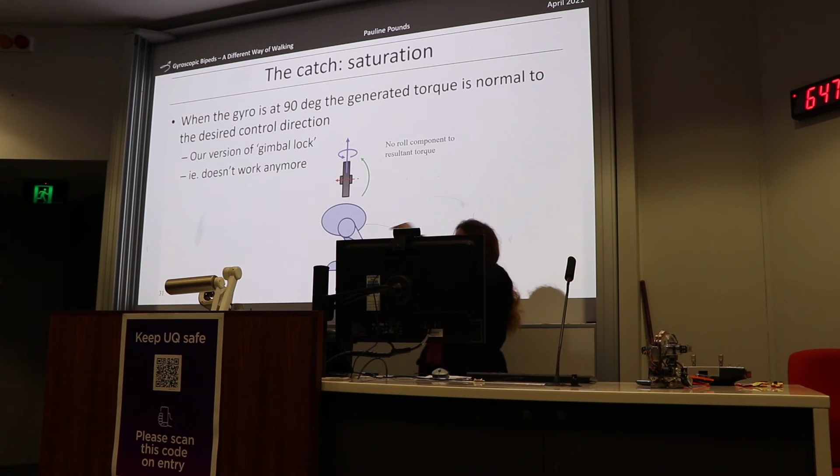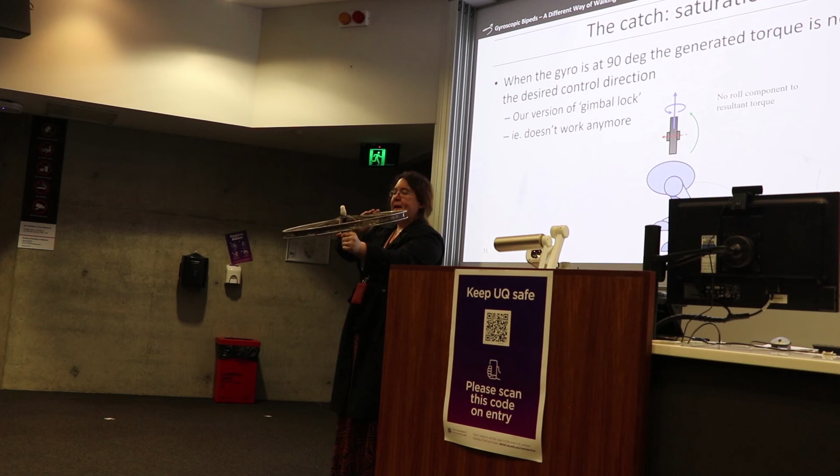When our gyro goes to 90 degrees, we have a saturation problem, because at that point we can't actually get any cross force. Remember, you have to rotate at 90 degrees to the direction you want to apply force in. So at this point, as I rotate, when I continue to apply torque in that direction, originally I was rotating in that direction. Now I'm applying torque in that direction, which is slightly in the plane of the ground. And at this point, it's actually entirely in the plane of the ground.

And I can't apply any more torque in the direction that I need to correct in. Well, shitballs, what do? This is effectively gimbal lock. Doesn't work anymore. So we can't ever let our system get to 90 degrees. We need a way to unwind that gyroscope.

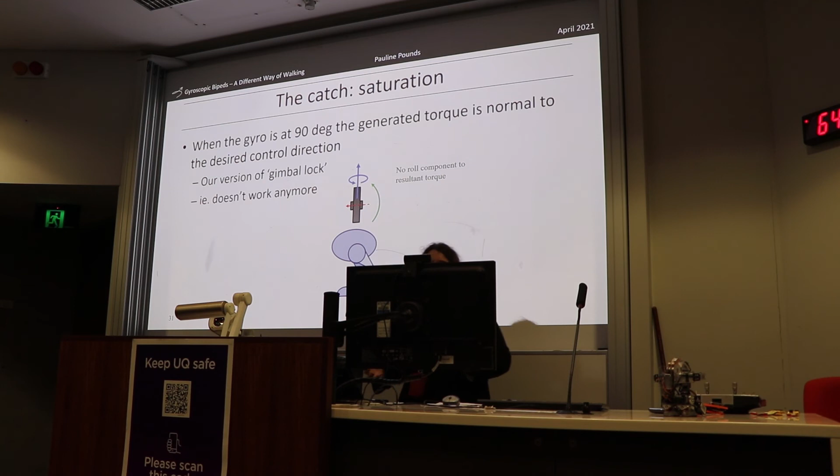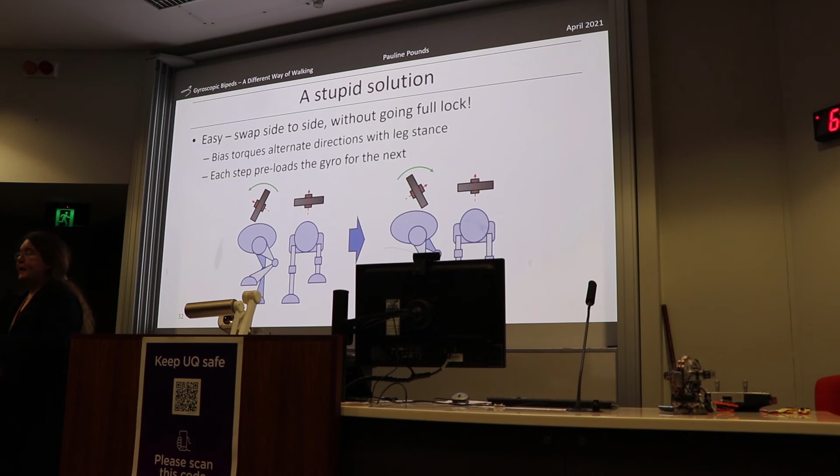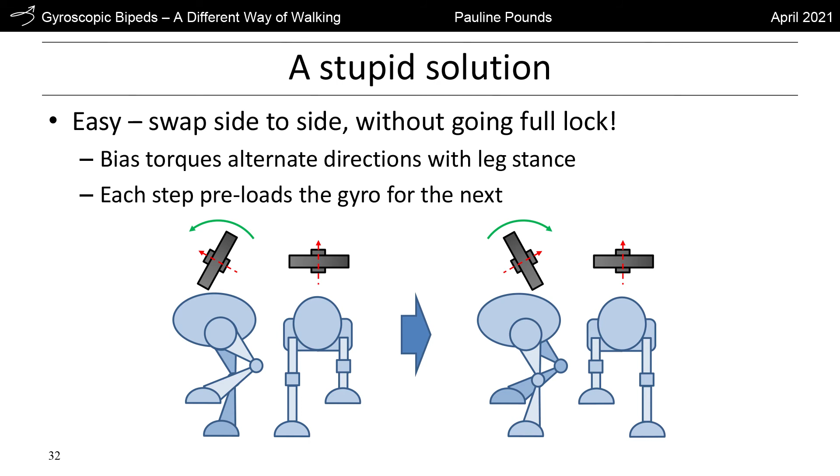So one thing we can do is simply say, well, okay, we have a biped. During one leg lift, I'm going to fall this way, and my gyroscope will move one way. During the other leg lift, I'll fall this way, and my gyroscope will go the other way. And as long as my left leg and right leg stance phase is roughly balanced out, my gyroscope is going to be going forward, backwards, forwards, backwards, forwards, backwards. And as long as they're roughly equal, it will never get too far away from the center. Seems reasonable enough.

However, the world's not perfect. There is no music of the spheres. There's no geometric equivalence to anything. Left is not right, up is not down. There's always going to be error accumulation. This is a bitter lesson that you will all learn as control engineers, right? Nothing is perfect and everything sucks. And it's our job as engineers to take raw, unwilling, disobedient matter and bend it to our wills.

Just do pure math. The numbers should work. Oh, pure math. Pure math. Oh, why don't we go and do arts while we're at it? No, actually, pure math totally has its place in life. And some of the very best engineers I've ever worked with have been maths engineers because they understand the music of the spheres. And they're just that little bit applied enough to bring the celestial wisdom down and make it work. In fact, my PhD professor was a maths engineering major. Started in geology and left because there wasn't enough math in it.

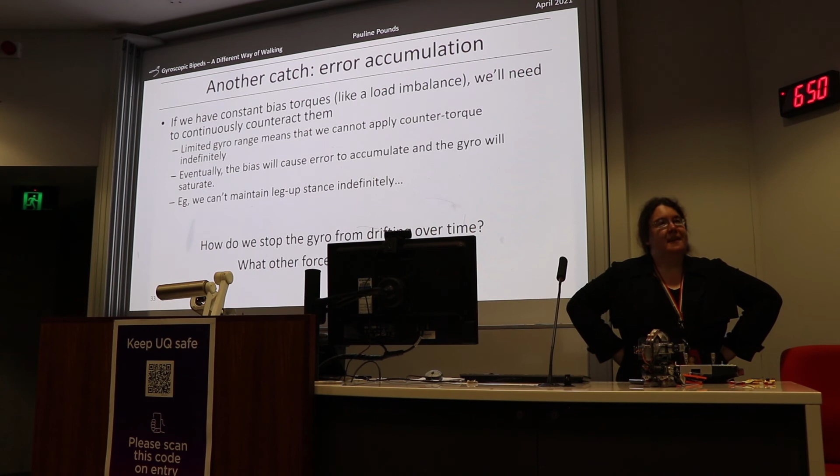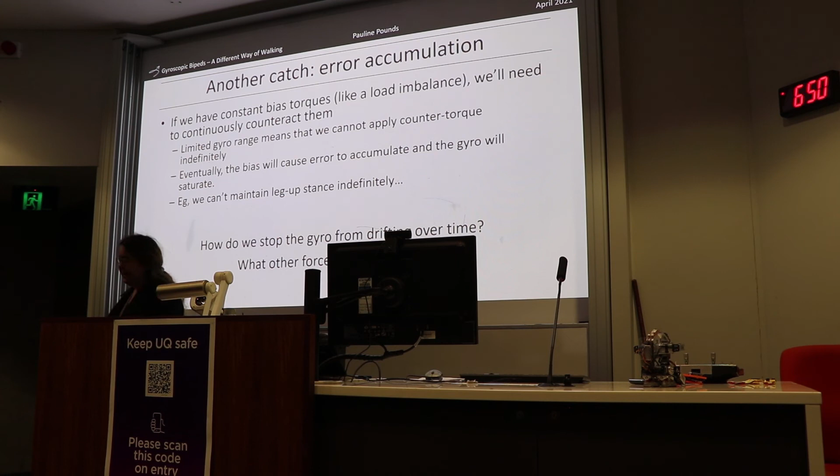Sick. All right, anyway. So we need a way to deal with the small accumulations of bias and momentum imbalance. So eventually we're going to have to find some way to fix this. Consequence of this is we can't hold our leg up forever. Because if I just go, nyeh, my servo will drive my thing all the way to the end, and then I can't compensate anymore and I fall over. We need a solution.

All right, couple of stupid solutions we can use. Thing number one, I have a hip. I am hip with it. Hip with the kids. Sorry, there's a joke in there somewhere. I'm old. Right? If I tilt forward, I'll start to fall forward.

If I tilt backwards, I'll start to fall backwards. And if my gyroscope is too far left or too far right, I could actually tilt forward and then unload my gyroscope and then tilt back. And I can do that without compromising my ability to compensate for my torque motions, because I can do it slowly. Small tilt forward, unload the gyroscope. Small tilt backwards, reload the gyroscope. That's great. What about forward backwards?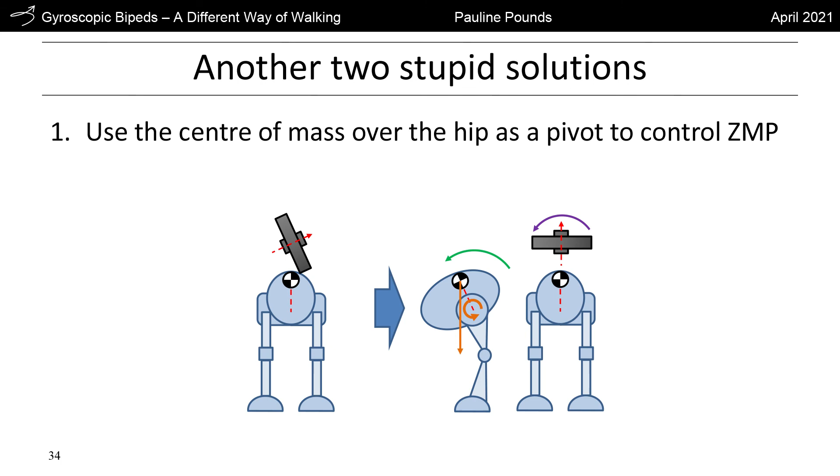What can we do? Well, it turns out that at various points in your stance phase, you have to have 2 feet on the ground. Unless you're running, in which case that's another set of problems. You always have to put one foot down to pick another foot up again. If you found a way to walk without doing that, please let me know, because that would be really handy.

But during that dual stance support phase, it turns out that you describe a line between your two contact points. And if I rotate my gyroscope parallel to that line, I'll apply a torque 90 degrees out, which is directly in the line of my dual support stance. And at that point, I can unload as much torque as I want, because my servos are able to keep me on the ground, and unless my knee collapses, I can just go back to level.

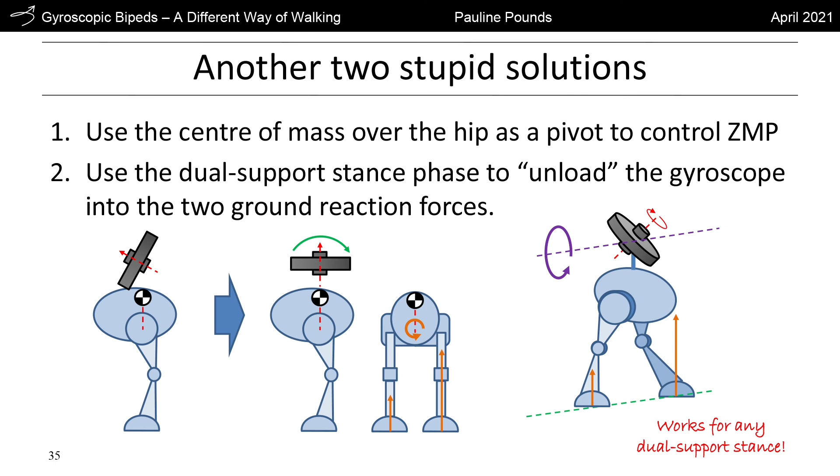So if I'm off at some weird angle, and I take a step, I can tilt forward and backwards to bring myself level again. And then I can actually overcompensate until my line is parallel with my foot contact and pull myself back. So for every single step pair, I can reorient my gyroscope. Now, of course, it's harder than it looks, right? You have to do the math for it. But we call this a relaxation controller. And it turns out that there's some very, very simple ways analytically of coding them into your control system.

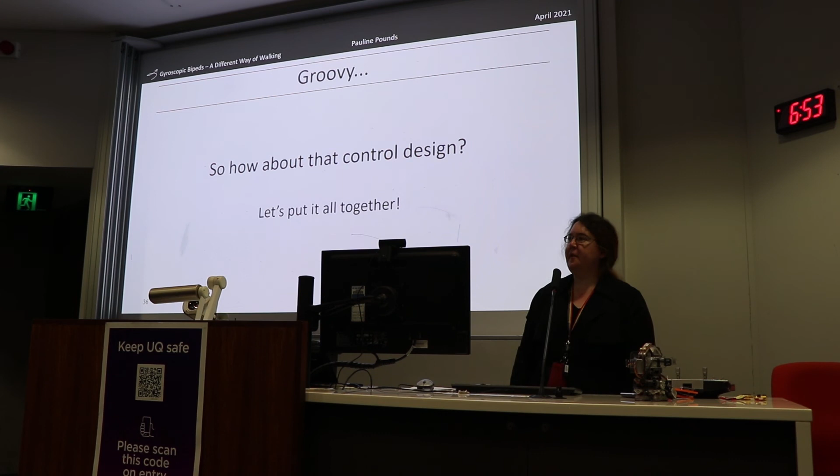Groovy. So, how do we do that? Let's do a control design. It looks a bit like this. I've broken it up into conveniently bite-sized pieces so you can understand what the hell I'm talking about. So remember that PD control, attitude stability. Now, this may look like a PI control to you. It looks like I. But remember,

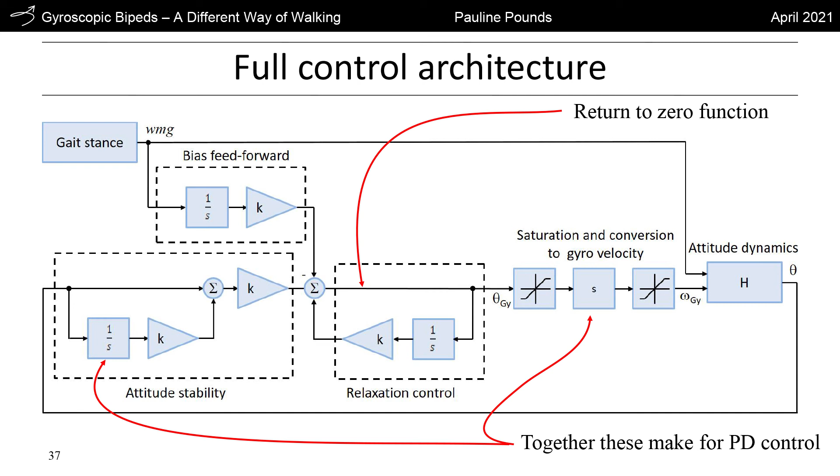gyroscopes are controlled by the crosswise velocity. And hobby servos are controlled by position. So somewhere you need to implement an integrator or a differentiator into your system. So we threw one in there, right? By the time we differentiate it, it comes back to being PD. So it's weird, we implement a PI control, but under the hood, it's actually a PD control.

We do the same games with our relaxation control, which basically just allows us to integrate back out and return to zero. Groovy. Oh, and there's our feed-forward bias thing and a gait stance generator, so we can do the feed-forward control.

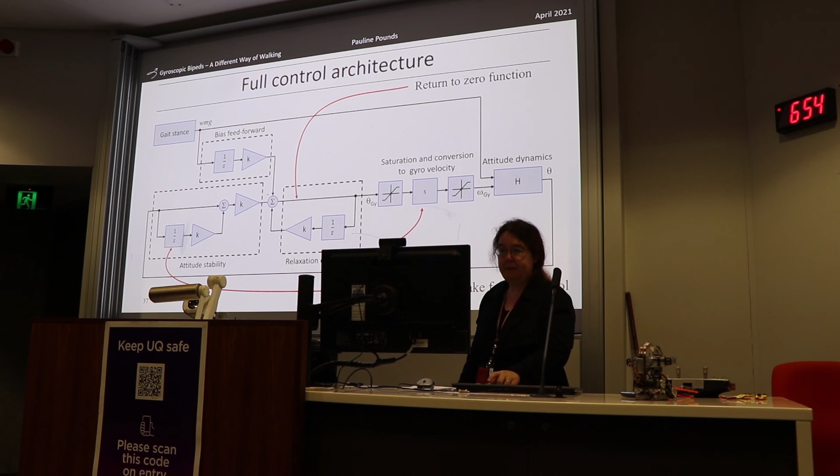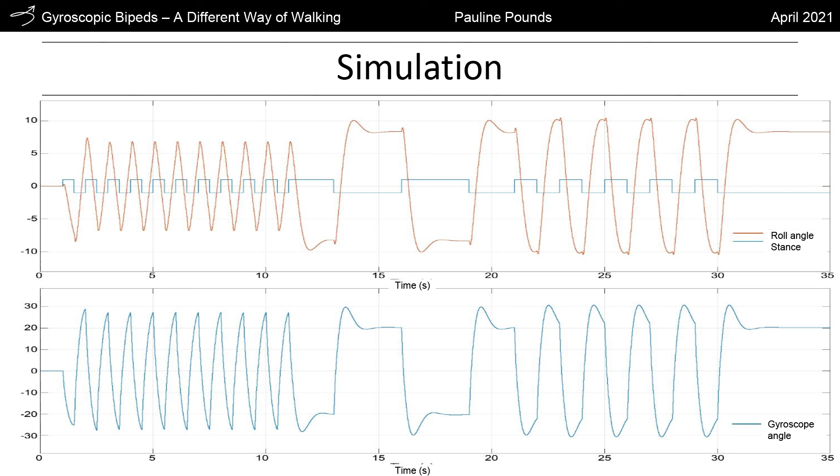Do some simulation, because you're not going to go and spend a bunch of money building something if you're not confident it's going to work in the simulator first. And you can see that we have something that looks sensible. That blue line on the top is our stance. So +1 means on one foot, -1 means on the other foot, 0 means both feet. Why? Because then I can just multiply the bias force by whatever the stance happens to be.

That orangey color there is the orientation of the biped. So we sway about ±7 degrees. We have a little bit of a wobble during the long steps, just because we overshoot slightly. And then we come back to a constant offset when we put our foot down again. Why a constant offset? Because I haven't quite implemented that correctly.

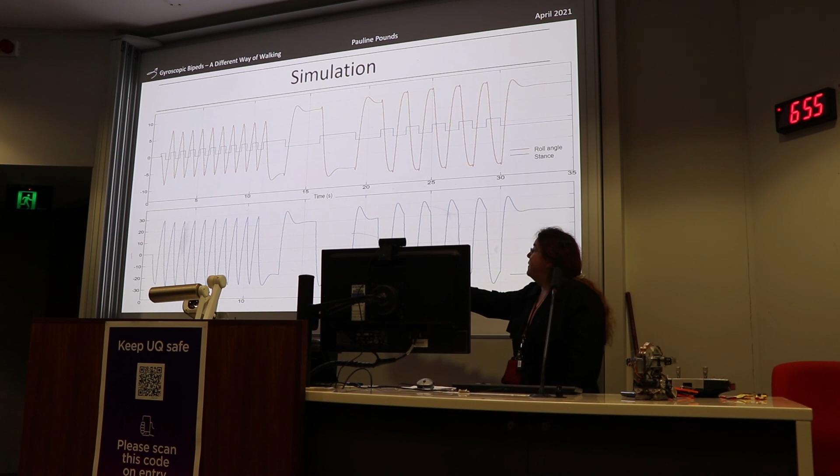And here you can see on the bottom, this is actually the angle in degrees of our gyroscope. And you can see that the stage is going ± about 30 degrees either side, which these are numbers I like. These are numbers I can work with. Okay, that's great. But does it work?

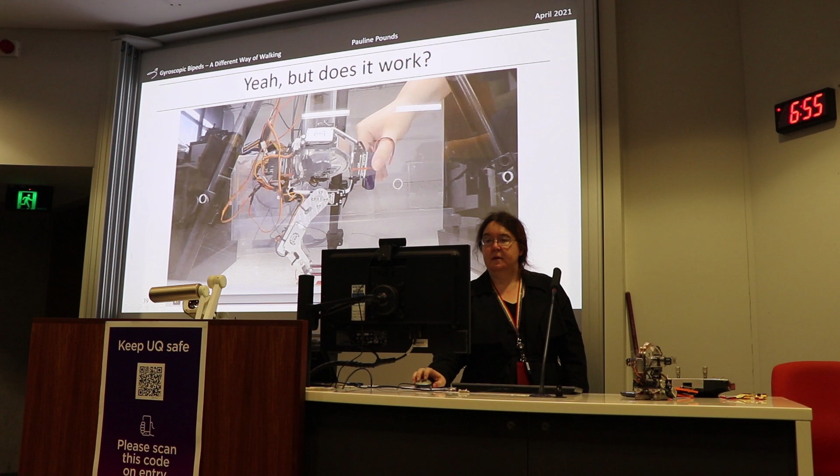So this is a single axis test. So this is dual support stance. So both legs together, their pivot axes aligned. And you can see it's not moving very much until that weird little twitch there, and then it catches itself and it stabilizes again. We have a battery bolted on the front as a counterweight. All right. Why a counterweight?

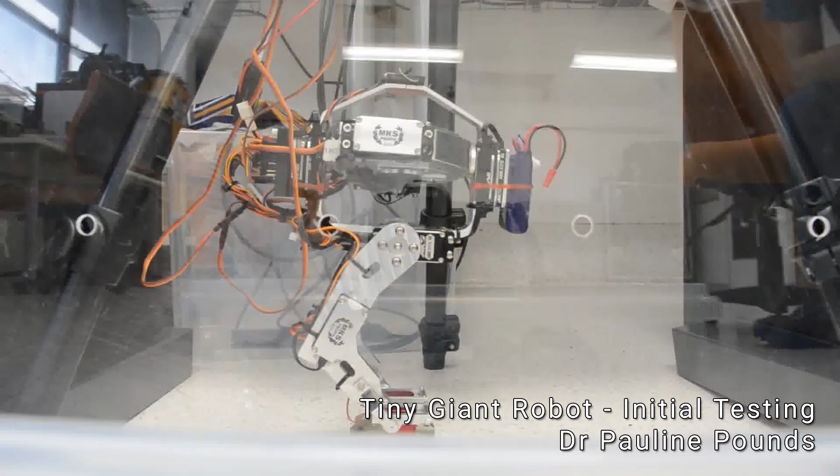Well, we absolutely missed this at the time, but it turns out the legs don't weigh 0. I know, who knew? And these guys, these servos, being offset from the pivot, are constantly applying a backwards load. So we had to put a counterweight on the front in order to make the forward and backwards balance work out. Yeah, I know. That's what you get if you've never built one before.

So if you actually look at the measurement there, we had a very low data recording resolution because we didn't quite have things set up properly. But you can see that the values look pretty sensible, although there's that long-term accumulation of error that I warned about. And then there's this weird little glitch here. What's that weird little glitch?

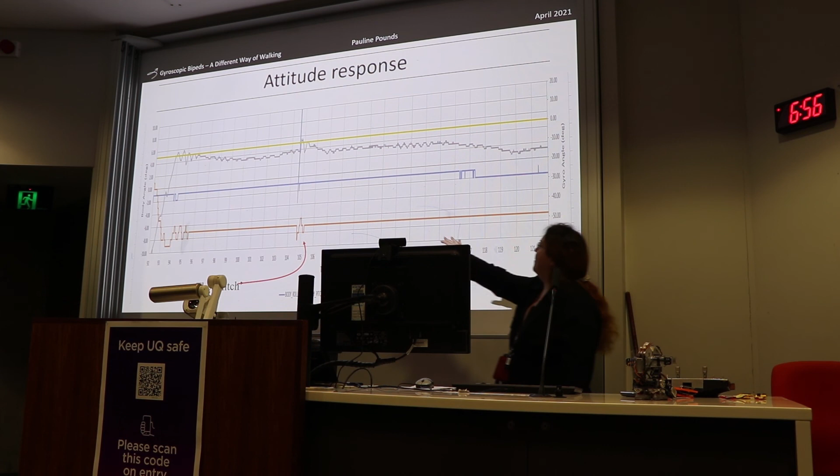Turned out we actually had a problem with our driver for our IMU, where we interpreted a certain signal wrong as it crossed over a boundary. And right at the point where the thing crossed 0, it shat itself and produced a weird little glitch. And as soon as it left, it then went back to 0 again and everything worked. And this actually shows inadvertently that it has some nice disturbance rejection capability. But as you can see, we've not corrected for the error windup.

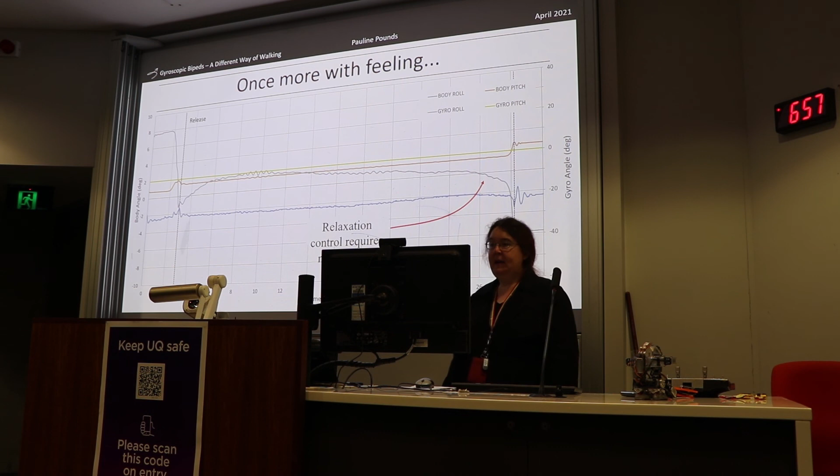So we tried it again, and this time we fixed the glitch with the 0 crossing problem, and we got a much higher resolution in data recording. And now you can see it has a quite beautiful approach in stabilization. This is the second test we ever did with stabilization. And you can see we've terminated the test there.

So at this point, this is all of our published work. Right, we have longitudinal stability in the dual support stance, i.e. the easy bit. Right, this bit didn't scare me at all, and it rejects disturbances nicely. It's a mess of cables protruding from the butt end of the robot, and we really need to clean that up. They're actually a source of disturbance to the robot.

And we had to redesign our control system to fit more cleanly under the center of gravity, and we added some Bluetooth in order to make data collection much easier without requiring a cable. We want to rebuild the system on a 32-bit processor, port the code across, fully refactor that code to run at 400 Hertz internally with a 100 Hertz control loop, and hopefully we'll get smooth gait generation out of that.

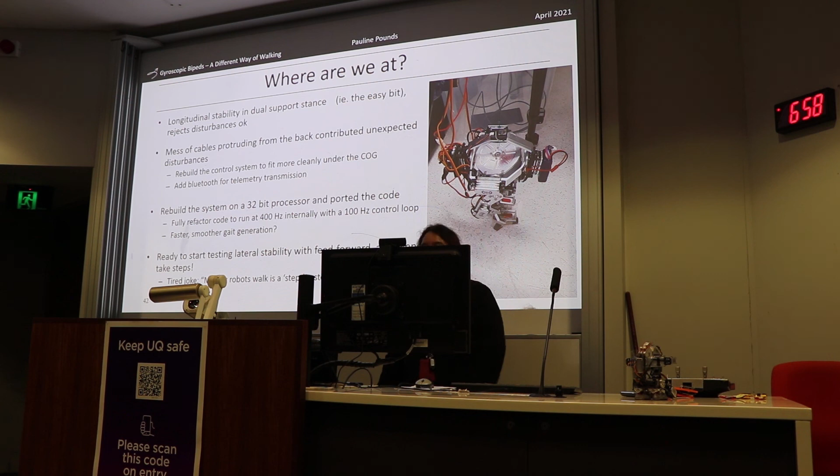So we're ready to start testing for lateral stability with feed forward and then start taking steps. And my tired joke is making robots walk is a step-by-step process. Yeah, I know. I can hear it in your minds. All right. That's the boring bits. Let's get to the interesting bit.